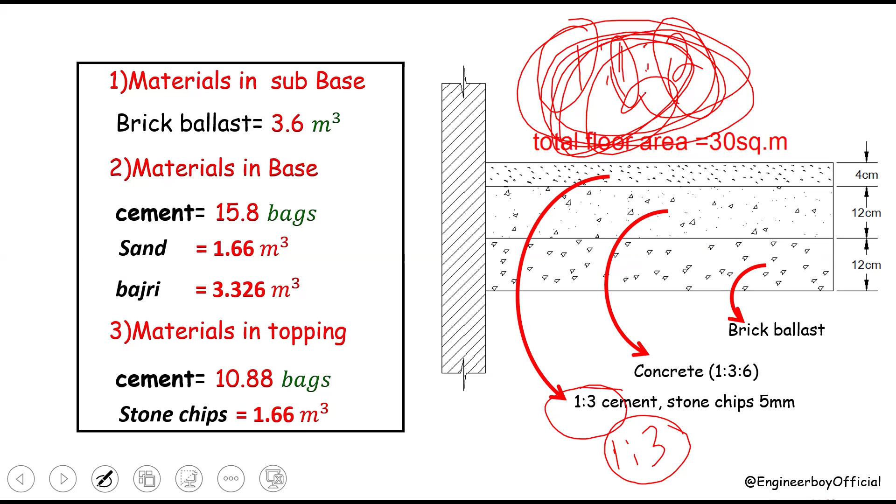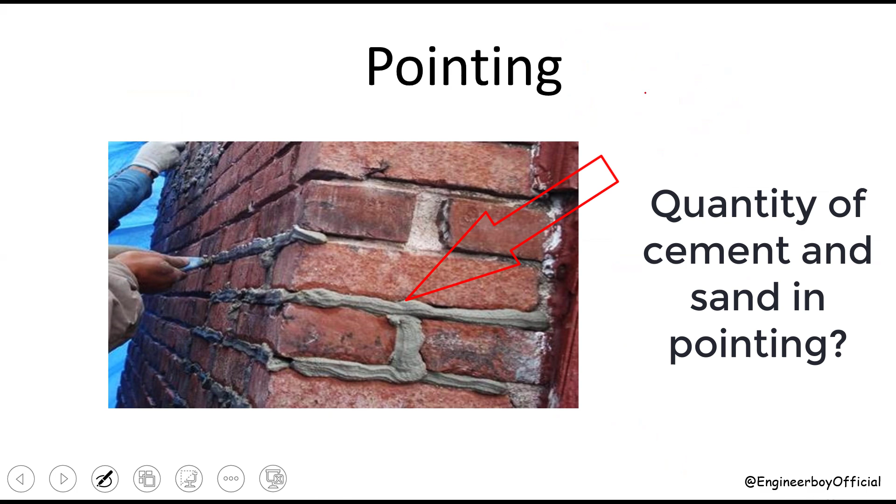And next we have actually the pointing. Are you guys familiar with pointing? It is the same thing as plaster, but we do not cover the brick faces, maybe the headers, maybe the stretchers of the brick. So we don't cover them, we just fill the joints, and that is just known as pointing.

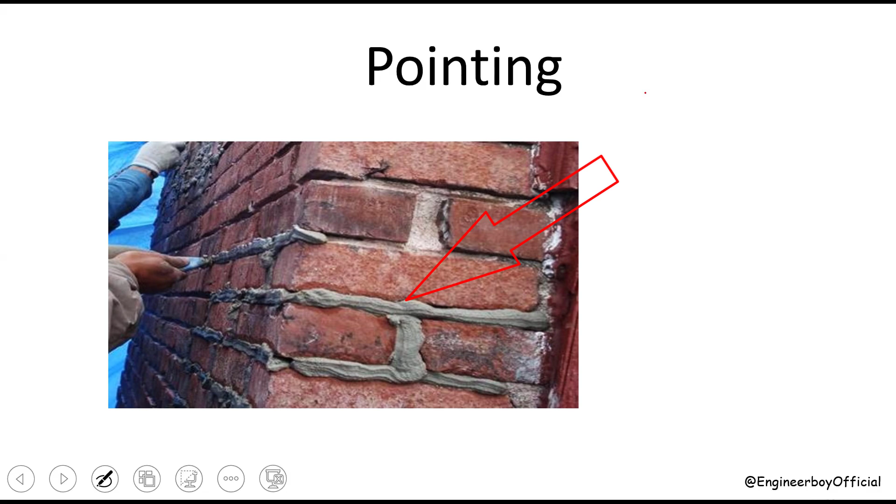And these things are very famous in the construction of, you can say, the walls of government buildings. Let me just show you the diagram. You can see it, we have this brick, and here the joint is just filled with the mortar, you can see that.

There are a bunch of types, okay, however these two are very common so I have just picked them up in the same presentation. One is the deep struck pointing, and then we have the flush pointing. So these two are commonly used for buildings, that's why we will just cover them only.

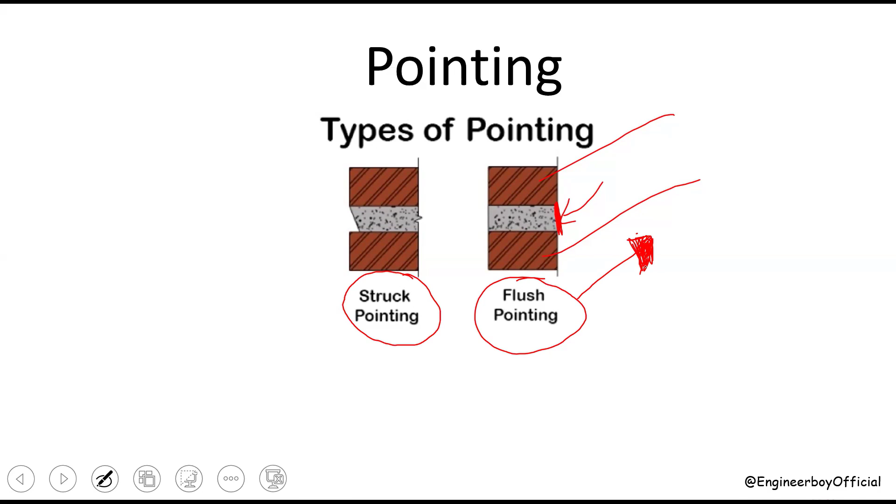The process or analysis for the same pointing is actually the same thing as the analysis for plaster work. What we do in plaster work is we determine the wet volume, then the dry volume, because plaster is actually just the same thing as mortar. And then, of course, we determine the cement and then the sand.

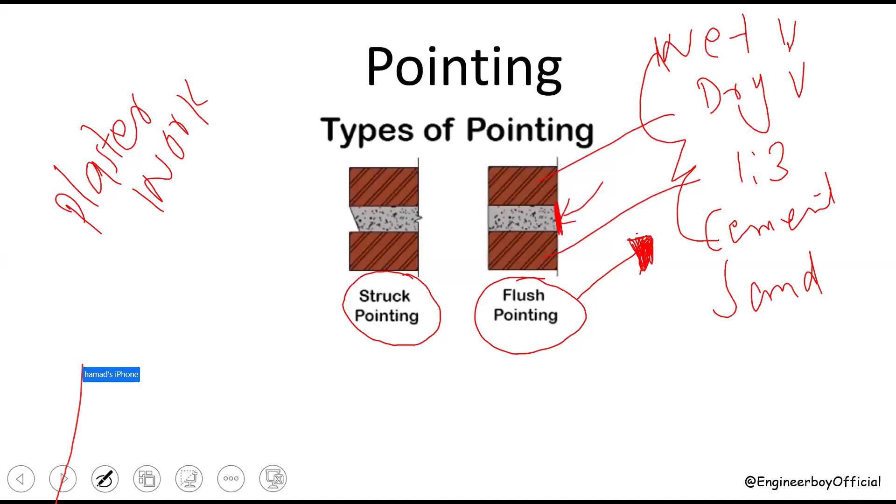We actually repeat the same process for the pointing. However, in plaster, the thickness of the plaster and the thickness of the pointing can be different. What should be the thickness for the deep struck pointing? It should be 13 mm. And for the flush pointing, it should be 6 mm.

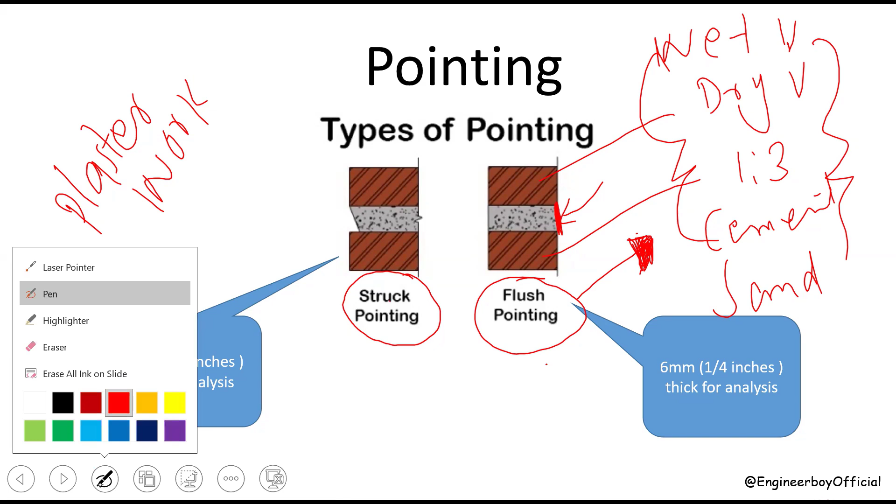So in pointing, we have these two types, okay? Deep struck, here I have just mentioned struck, it is just actually deep struck, okay, and then the flush pointing. So you have to use 6 mm thickness for the flush and 13 mm thickness for the deep struck, okay?

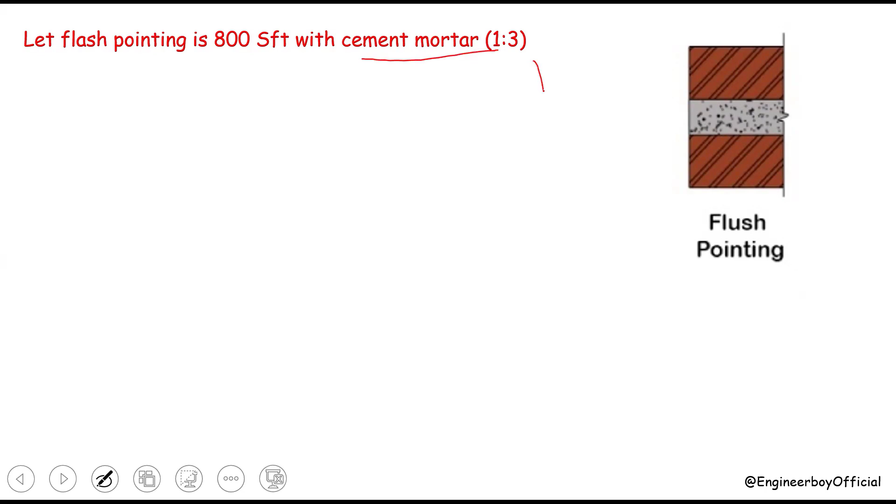Okay, let's just have an example. You guys can see the screen, right? Yes, sir. Okay, here we have a flush pointing, and it is, you can say, 800 square feet. The area that is just 800 square feet. Now the cement mortar ratio, that is actually 1:3. I think this data is just enough to determine different materials for the same pointing, okay?

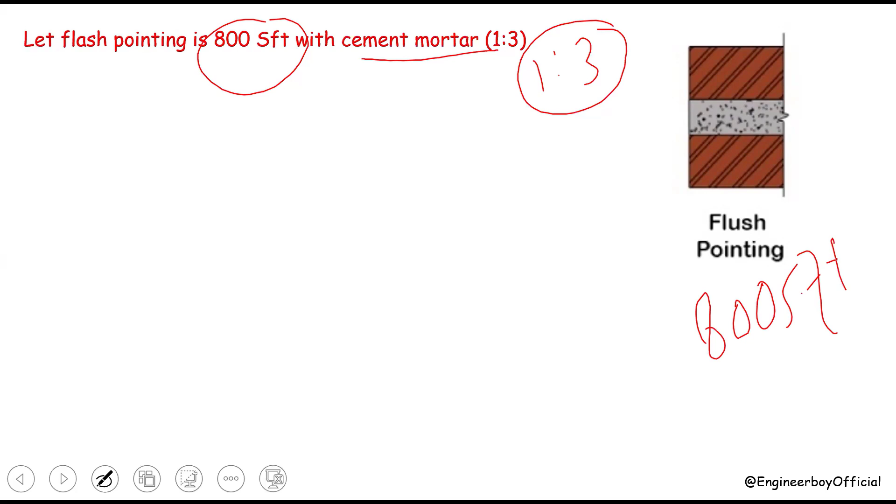You have to use 800 SFT, I mean the same area, for struck pointing. And then you have to send me the quantity of cement and then the quantity of sand, okay? Let me just calculate these two things for the same pointing.

We need the volume of the pointing. For that, we will just multiply the area of the pointing with the thickness, okay? The area that is just known, which is 800 SFT. And the thickness that is also just known. If you remember, we have noted it, right?

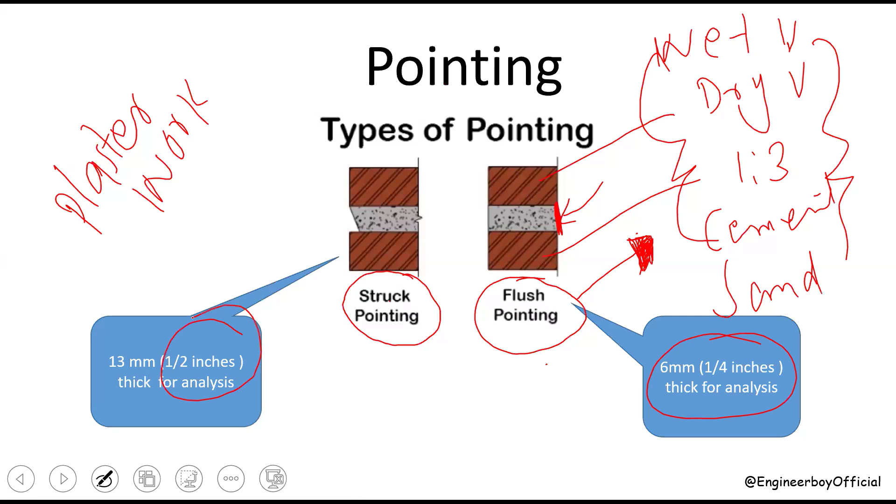And that is actually 1/4 inches, or maybe if you remember, it was just, you can see it, okay, 6 mm. So 6 mm is just the same thing as 1/4 inches. For the struck, you have to use 1/2 inches, no problem, or you can say half inch.

Okay, so now the volume must be area times the thickness. Area is known at 800. The thickness is 1/4 inches. But if you see the area, that is in square feet, however the thickness, it is just 1/4 inches. It means we have to convert inches into feet first, that's why we have to divide this by 12, because 1 feet means 12 inches. Now, area times thickness, that should be 16.67 CFT.

Very easy. Now, once we have the volume, it means we can easily calculate the materials. It is just the same formula: cement equals the ratio of the material divided by the sum of ratio, times the dry volume. It means we need the dry volume, okay? Now, it is the same thing as the mortar. So in order to determine the quantity of dry volume, we have to multiply the wet volume with the factor, which is 1.27.

Never ask me where 1.27 comes from, because we have already covered it. So it means the dry volume is now 21.167 CFT.

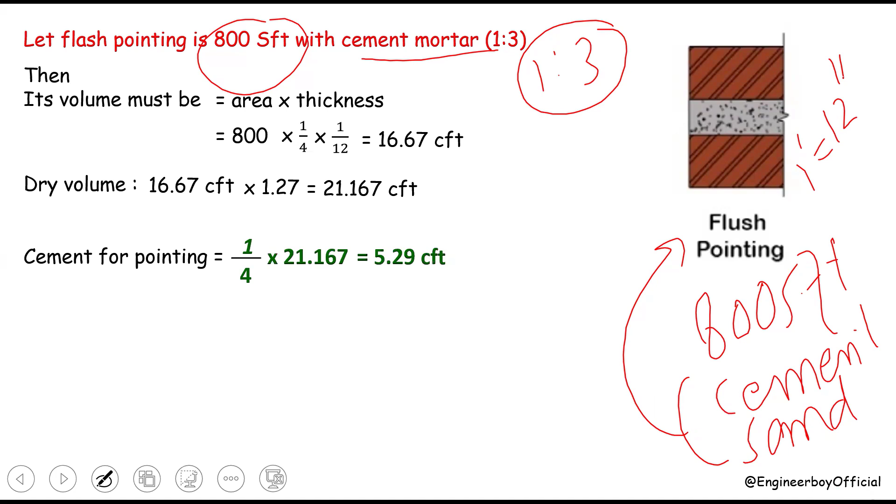Now we will determine the cement for the same pointing, which is 800 SFT. The cement must be the ratio of cement, which is 1, divided by the sum of ratio, which is 4, times the dry volume, which is 21. Doing the maths, we get 5.29 CFT. You can divide this by the volume of one cement bag to get 4.23 bags. The volume of one cement bag here in Pakistan is 1.25 CFT, so by dividing 5.29 by 1.25, we get 4.23 bags.

Next, sand is very easy and straightforward. Sand must be the quantity of cement, which has just been calculated, times the ratio of sand, which is 3. Multiplying these two, we get about 16 CFT, which may be 15.8 or 9 something, that's why I've written 16 CFT approximately. So this is how we can calculate different materials for the pointing.

If there is no question, I'm ending the session.

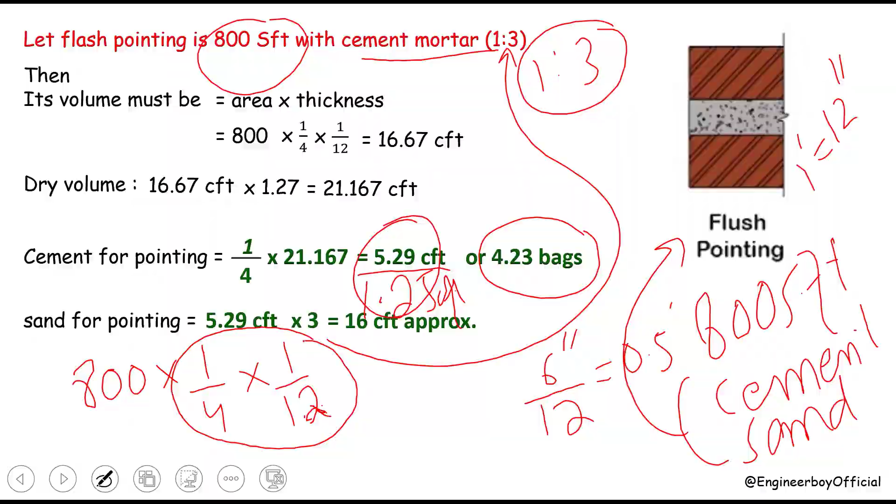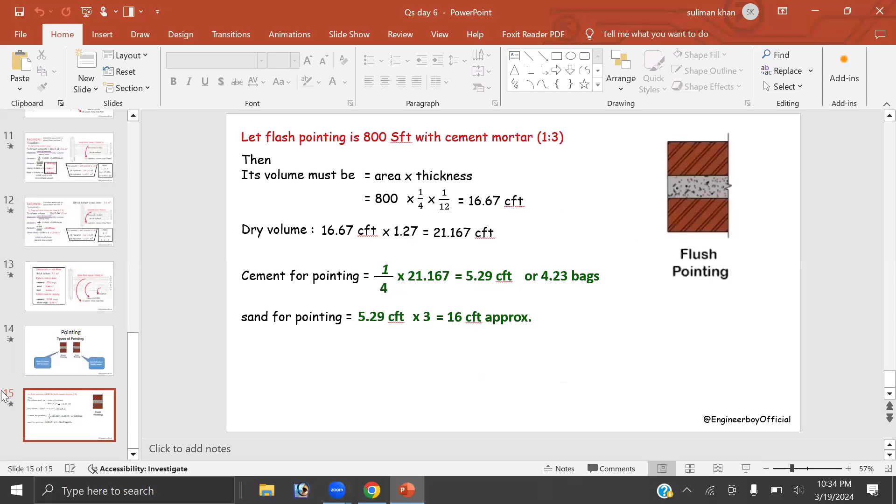Okay, again, let me have another slide so I can make you understand. Just a simple one, okay. Let's have another new slide, and then you can see the screen, right? It is just a simple conversion.

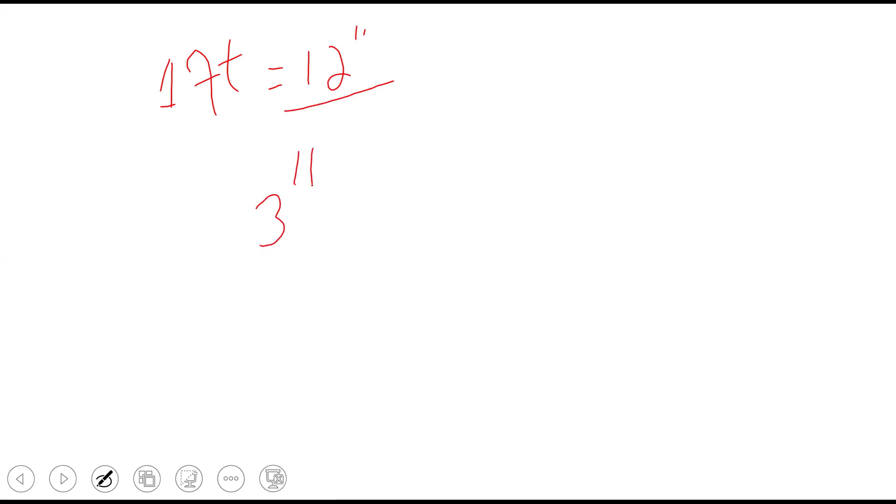If you remember, 1 feet is just 12 inches. Now, in order to convert inches into feet, you have to divide the value by 12. Let's say we have 3 inches, so in feet, what should be the value? That's the reason we have to divide 3 inches by 12, and that becomes 0.25 feet.

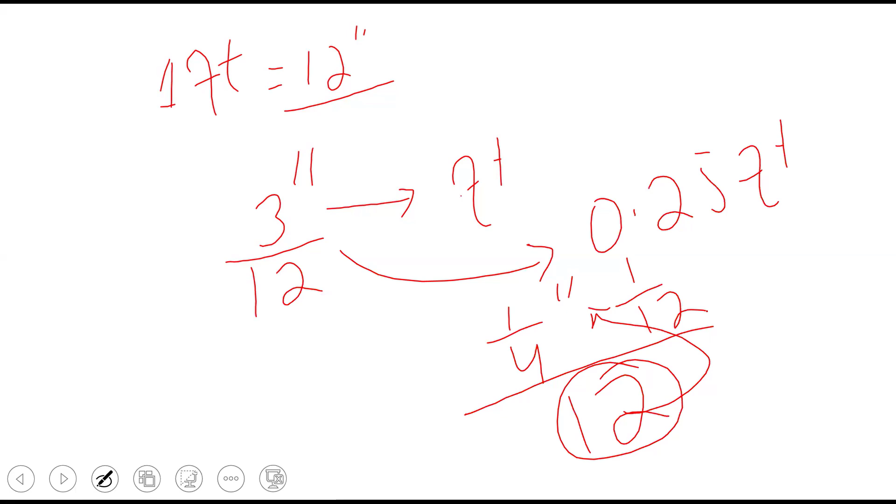Similarly, if we have 1/4 inches, you have to divide the same thing by 12, but we cannot write it in the same way mathematically. That is the reason I put this value over there in terms of 1/12. What do you guys see now? Is it okay? Yes, sir. Okay, right, never be confused by that. I'm gonna change this thing to a simpler form.

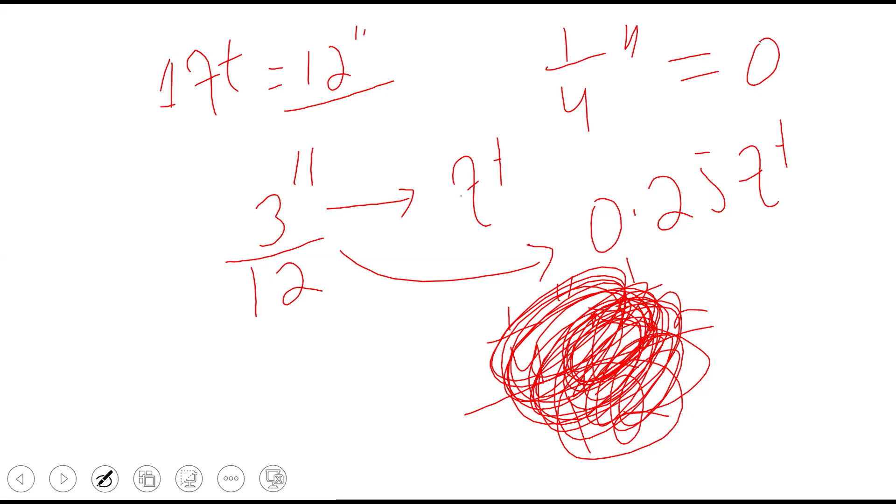Let's say we have 1/4 inches. What do you mean by 1/4 inches? It means 0.25 inches, right? Yes, sir, 1/4 inches means 0.25 inches. Now you have to divide 0.25 by 12, simple, it's the same thing. Is it clear now? Yes, sir. Is there any question now?

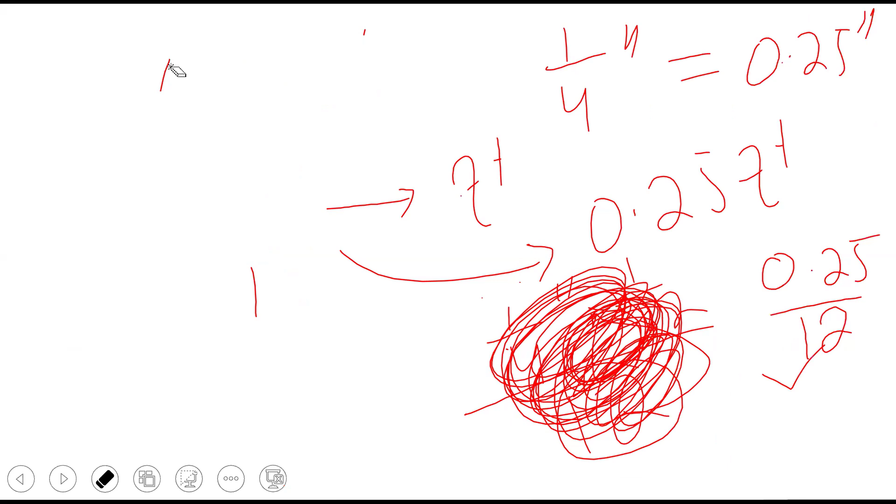Very good, very good. I'm not gonna tell you the exact value, but I'm gonna just convert it for you so you guys can even work it out. I know how you work, but let me just convert it for you, okay? And how do you convert it actually?

Without working it out, it's approximately 2 point... wait a minute, it is 2.83 cubic meter approximately. But let's just work it out.

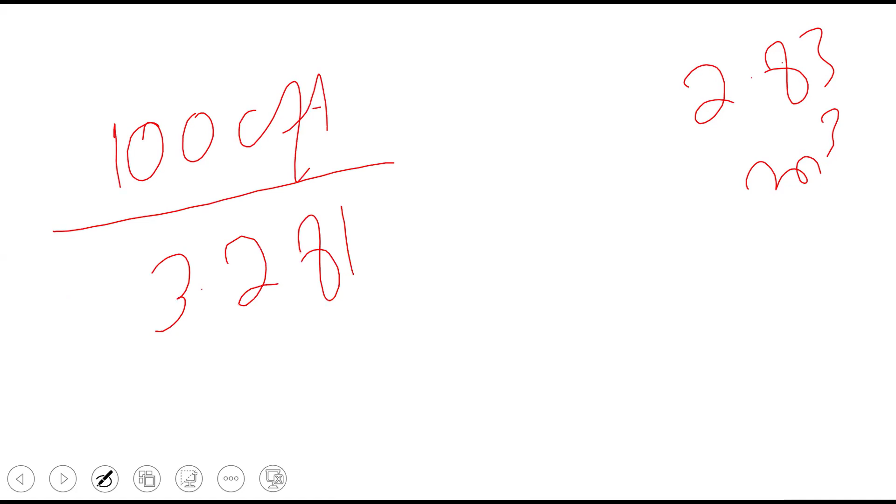We have 100 CFT. You have to divide this by 3.281 cubed, because 1 meter means 3.281 feet. That's clear? Yes, sir. So 100 divided by 3.281 cubed actually becomes 2.83 cubic meter.